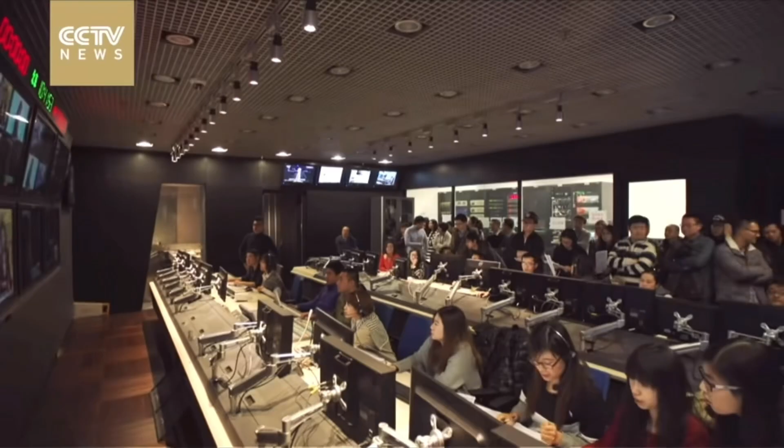This building is the headquarters of CCTV, China's main state-owned television broadcasting network, and is located in Beijing and includes administrative offices, newsrooms, broadcasting rooms, program production rooms, and studios.

At the time, Beijing was undergoing a massive urban redevelopment project ahead of the 2008 Olympic Games, which required a new landmark building. In addition, the existing CCTV headquarters was struggling to keep up with the latest broadcasting technology and efficient operations due to its aging facilities and remote space, and required a new headquarters that would incorporate the latest broadcasting technology, provide a variety of broadcast studios, and ample office space.

The project was therefore undertaken by Rem Koolhaas and his architectural firm OMA. Dutch architect Rem Koolhaas is one of the most influential architects in contemporary architecture, known for his innovative and experimental designs. His major works include the Seattle Central Library, Casa da Musica, and De Rotterdam.

His work often reflects a specific social and cultural context, and he believes that architecture should function as a social phenomenon, not just a building. These characteristics of the architect are also reflected in the CCTV headquarters.

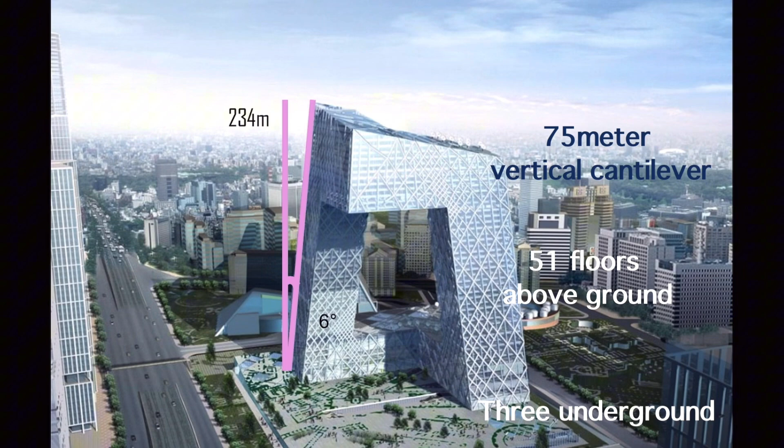The CCTV headquarters is about 234 meters tall, with 51 floors above ground and 3 underground, consisting of 2 towers tilted at 6 degrees, joined by a 75-meter vertical cantilever. The shape is similar to a prehistoric dolmen.

The construction of dolmens required a great deal of labor, and the larger the dolmen, the greater the authority and power of the group. With the CCTV headquarters building, Rem Koolhaas wanted to show the world that China had emerged as a world power through the Beijing Olympics.

And instead of competing for ultimate height and style within a traditional two-dimensional tower that soars toward the sky, CCTV's loop provides a truly three-dimensional experience, culminating in a 75-meter cantilever.

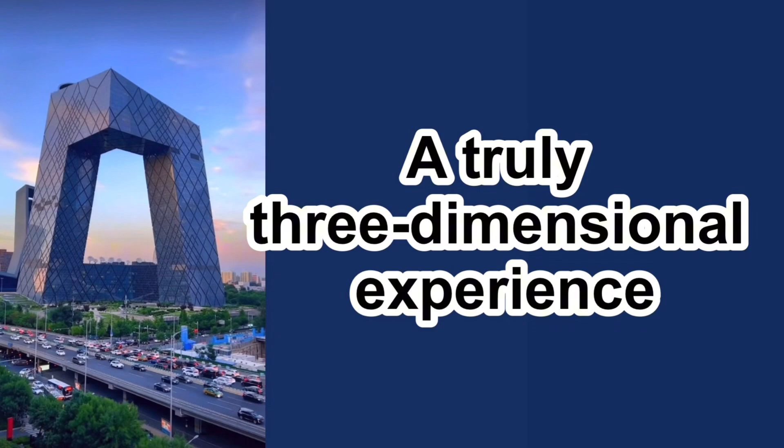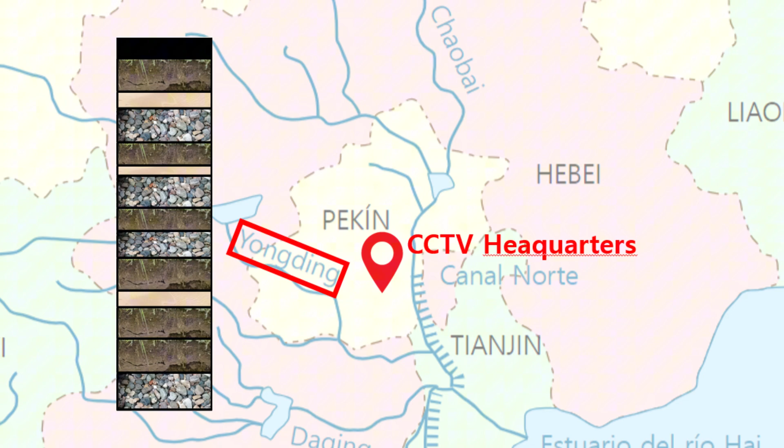However, due to this unique design, structural instability caused by the concentration of loads at one end has to be addressed. In addition, CCTV is located in the central business district of Chaoyang District, Beijing, China, which is in the middle and lower reaches of the Yongding River, which has weak soils and uneven ground.

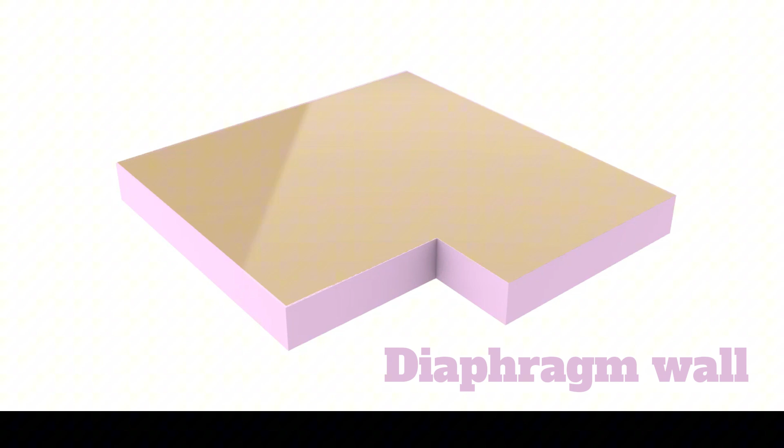Consequently, a piled raft foundation was chosen, followed by the bottom-up construction method, starting from the underground structures and progressing upwards. The process began with a soil investigation to evaluate the ground conditions and determine the optimal locations and depth for the piles. Once this assessment was complete, excavation commenced to reach the necessary depth for a stable foundation.

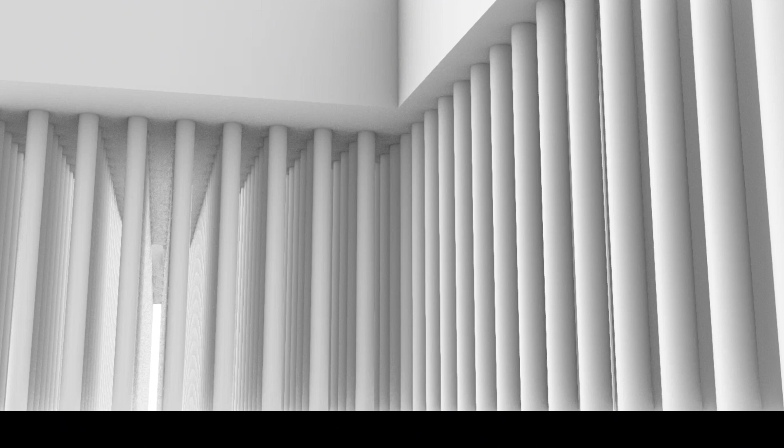During excavation, diaphragm walls were installed to prevent soil collapse and ensure stability. Upon completion of the excavation, piles with a diameter of 1.2 meters and a length of 52 meters were driven into the ground. These piles served to transfer the building's load to deeper, more stable soil layers.

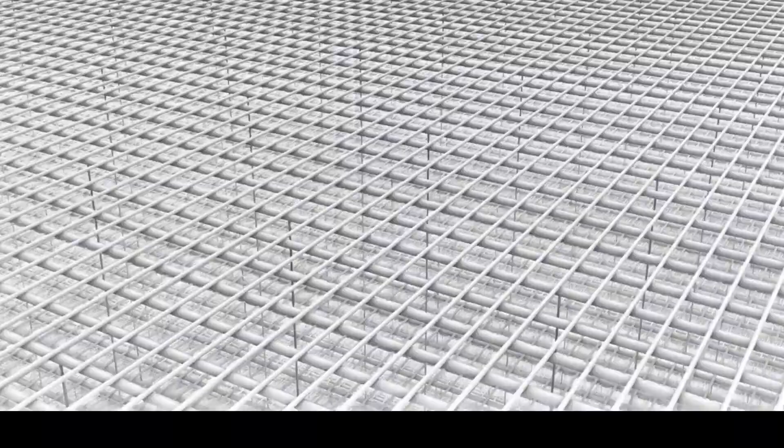Following the pile installation, the raft foundation was constructed atop the piles. The raft foundation works in conjunction with the piles to evenly distribute the entire building load, mitigating the risk of punching shear failure, which could occur if only piles were used due to their small cross-sectional area. After installing the piles, rebar was placed in the raft foundation and concrete was poured.

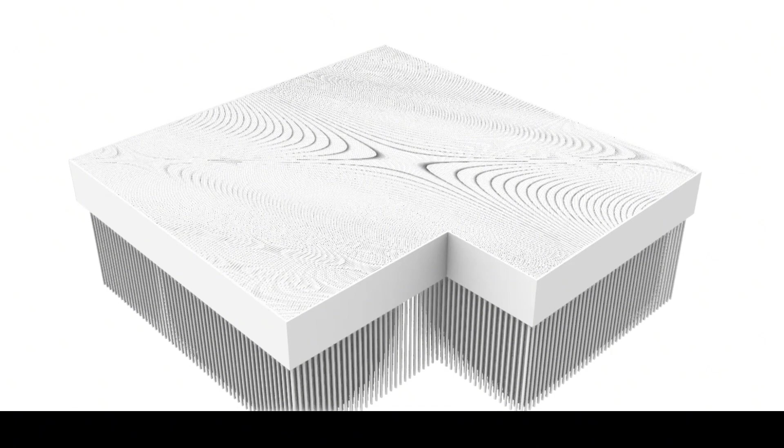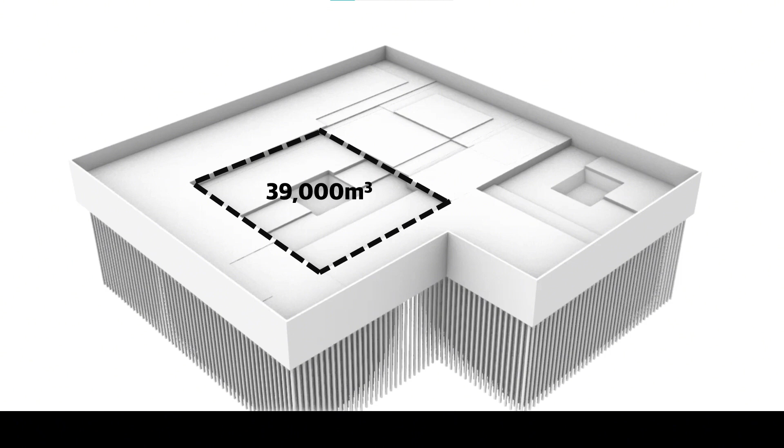HRB 500 grade rebar was used for the raft, with the lower section reinforced with 2 to 7 layers of mesh and the upper section with 2 to 3 layers of mesh. The concrete pouring for Tower 1 took 52 hours with a total volume of 39,000 cubic meters. For Tower 2, the concrete pouring took 54 hours with a total volume of 33,000 cubic meters. The total volume of concrete poured for the base plate exceeds 120,000 cubic meters.

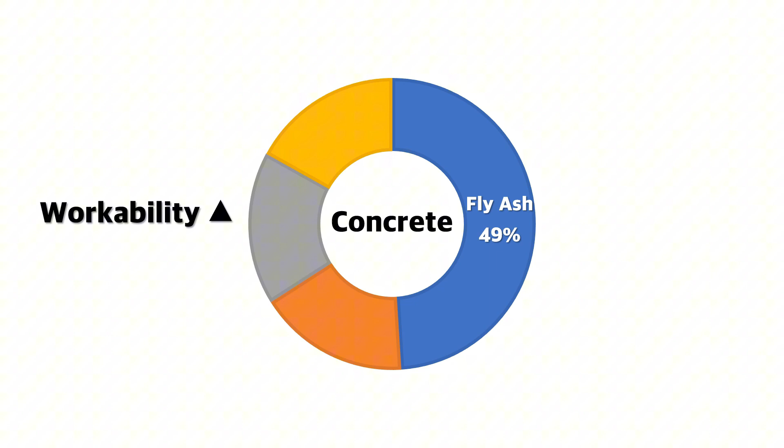During the massive concrete pouring process, crack control is the critical aspect. To address this, CCTV implemented two key methods. The first method involved increasing the proportion of fly ash in the concrete mix to 49%. Fly ash enhances the workability of concrete, reduces shrinkage, prevents shrinkage cracks, and lowers the heat of hydration, thus preventing temperature-induced cracking.

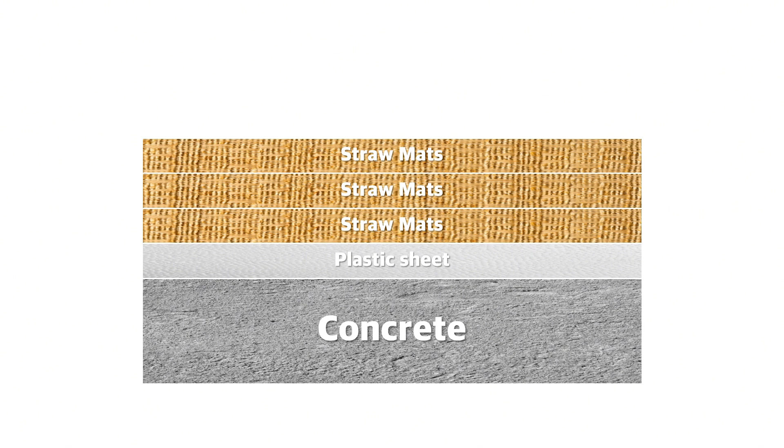The second method included using a combination of plastic sheets, 3 layers of straw mats, and 1 layer of canvas for insulation and curing. Additionally, a large-capacity computerized concrete temperature monitoring system was employed to measure the temperature in real time. Maintaining appropriate temperature and humidity levels while the concrete gains initial strength is crucial for preventing cracks, and this method effectively ensures this.

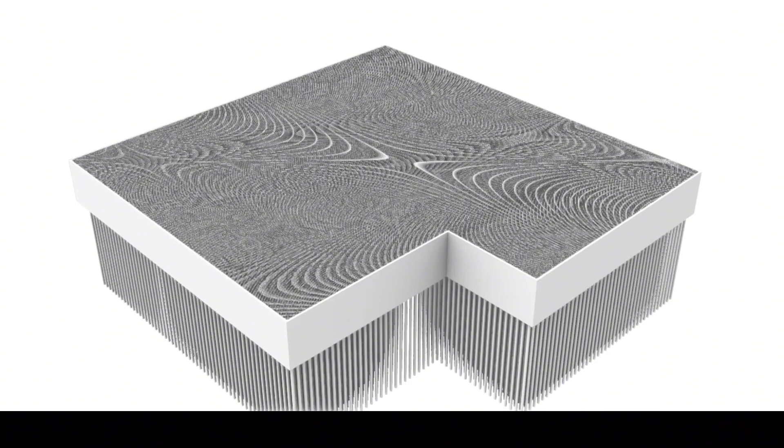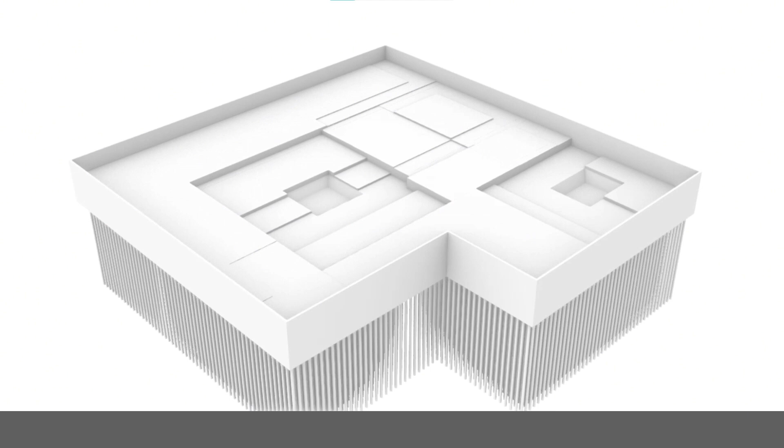HRB 500 grade rebar was used for the raft, with the lower section reinforced with 2 to 7 layers of mesh and the upper section with 2 to 3 layers of mesh. The concrete pouring for Tower 1 took 52 hours with a total volume of 39,000 cubic meters. For Tower 2, the concrete pouring took 54 hours with a total volume of 33,000 cubic meters. The total volume of concrete poured for the base plate exceeds 120,000 cubic meters.

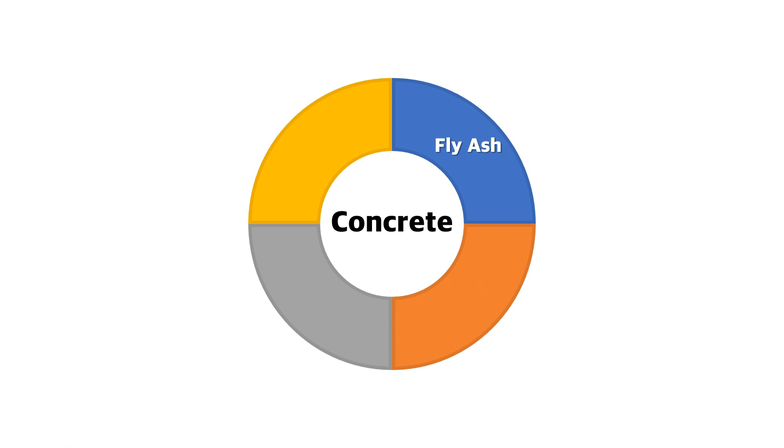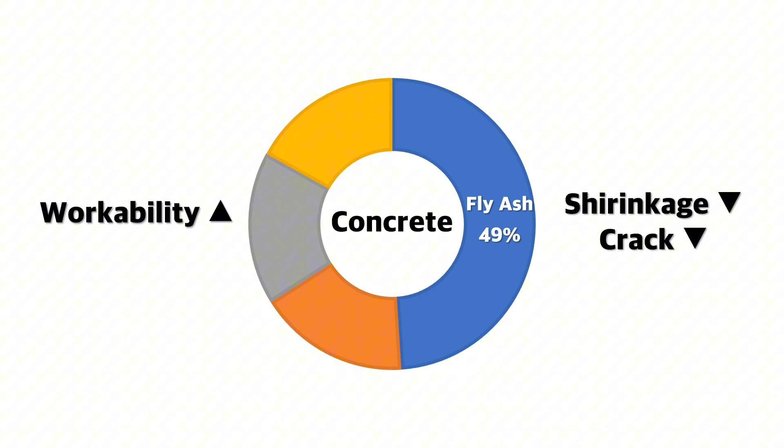During the massive concrete pouring process, crack control is the critical aspect. To address this, CCTV implemented two key methods. The first method involved increasing the proportion of fly ash in the concrete mix to 49%. Fly ash enhances the workability of concrete, reduces shrinkage, prevents shrinkage cracks, and lowers the heat of hydration, thus preventing temperature-induced cracking. The second method included using a combination of plastic sheets, 3 layers of straw mats, and 1 layer of canvas for insulation and maintenance.

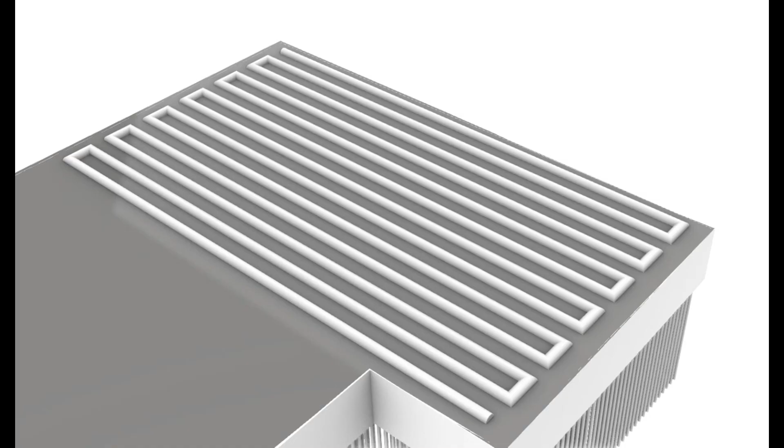Additionally, a large capacity concrete computer temperature monitoring system was employed to measure the temperature in real time. Maintaining appropriate temperature and humidity levels while the concrete gains initial strength is crucial for preventing cracks, and this method effectively ensures this. We also used pipe cooling to control internal heat generation during this process. This measure prevented the concrete from cracking and created a solid foundation.

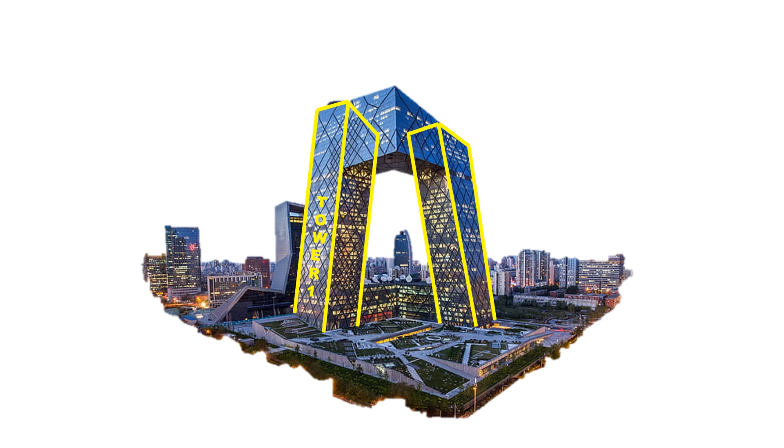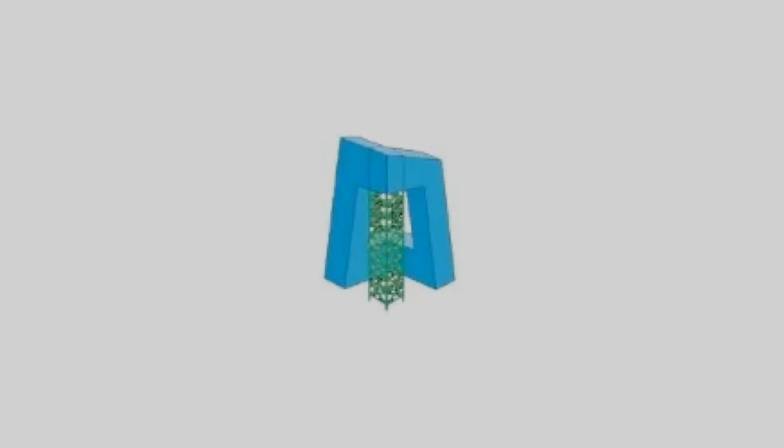The cantilevered portion of the CCTV required a different construction process than that of a conventional two-dimensional skyscraper. Therefore, ARUP considered a total of three methods to construct the cantilever. The first method considered was the temporary tower support method. This method uses temporary towers to support the structure while the cantilever of the building is constructed. This temporary tower provides the necessary support until the cantilever has achieved structural stability on its own. After that, the temporary tower is removed.

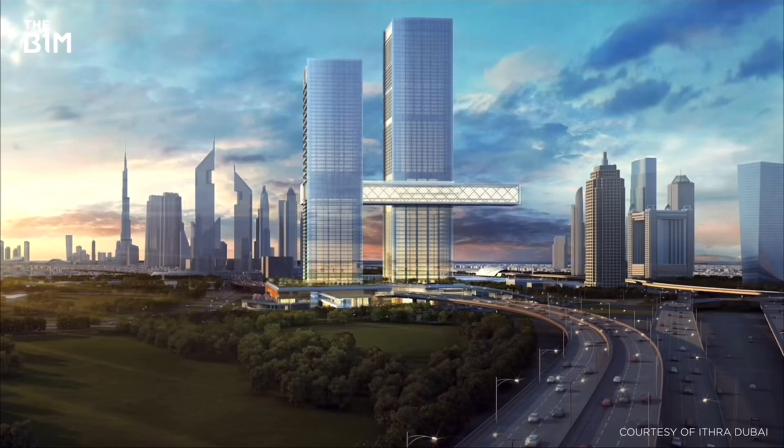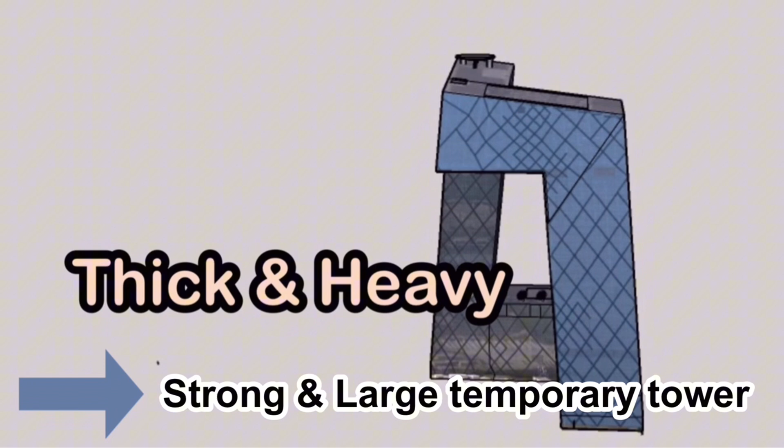For example, thin and long structures cannot resist bending moments on their own, so this method is used not only in bridges, but also in buildings with long and thin structures such as bridges. However, in the case of the CCTV cantilever, it is very thick and heavy, so there is a problem that it requires a strong and large temporary tower that can withstand a large load. Designing a temporary tower that could withstand a large load was not easy in itself, and even if designed, a lot of labor and cost were required to install, maintain, and remove the temporary tower, so a method other than this method was needed.

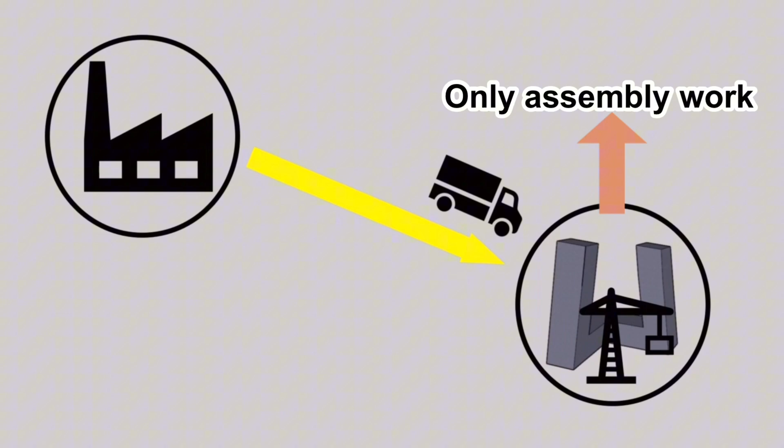The second method considered is the lift-up prefabrication method. In this method, the cantilever portion of the building is manufactured in a factory as large-scale modules, which are then transported to site and installed using a crane. Only assembly work is mainly performed on site. This method has the advantage of significantly reducing on-site work time and ensuring quality because the modules are manufactured in a highly controlled manufacturing environment, protected from external conditions such as weather.

The Umeda Sky Building's floating garden is a representative example of construction using a method of manufacturing modules and then lifting them. This building is located in Osaka, Japan, and is especially famous for the floating garden located at the top, a characteristic structure that connects two towers. The Umeda Sky Building floating garden consists of an observation deck and a relaxation area for visitors. It was suitable to use prefabricated modules because the internal structure was relatively simple and did not require additional heavy or complex equipment.

However, in the case of the CCTV headquarters building, the cantilever part is structurally complex because it accommodates the broadcasting studios and offices. This results in increased costs and technical difficulties in module production. Additionally, the complex structure also increases the weight of the module. This causes additional problems: the transportation cost of moving modules from the factory to the field increases, and the process of lifting and assembling heavier modules becomes much more difficult.

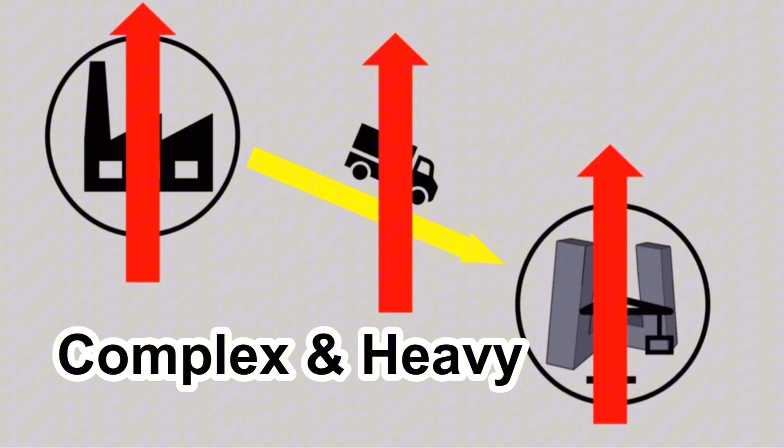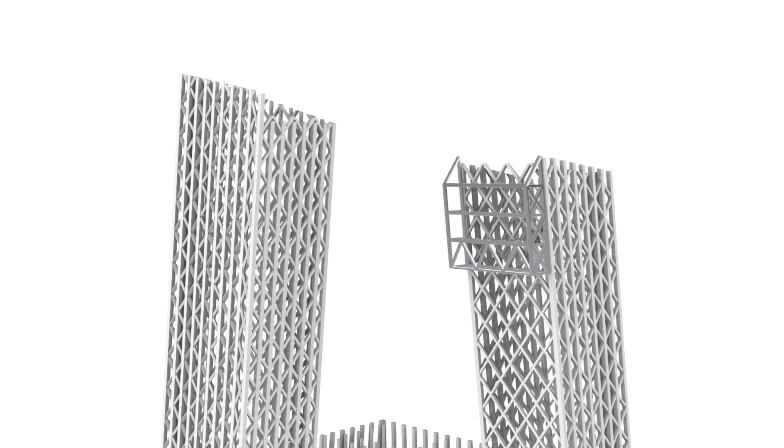So which method did ARUP adopt to solve the problems of the first and second methods? The method ultimately adopted for cantilever construction of the CCTV headquarters building is the balanced cantilever method. First, let's check the process of this method through a 3D model that we created ourselves. As you can see, during cantilever construction, a horizontal member is supported through a diagonal member and construction of two independent cantilevers is carried out. In this process, the lowest part of the cantilever meets first, and then construction of the remaining part proceeds.

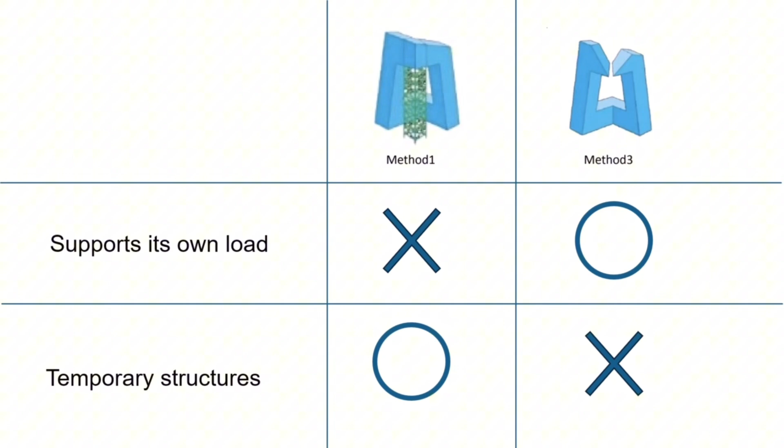This method is easy to adjust on site and can more accurately meet the design requirements of complex structures through a gradual construction process. Additionally, because it supports its own load, far fewer temporary structures are used compared to Method 1, and because both cantilevers are constructed on site at the same time, it takes less time and costs less in terms of transportation and crane operations than lifting complex and heavy modules using Method 2.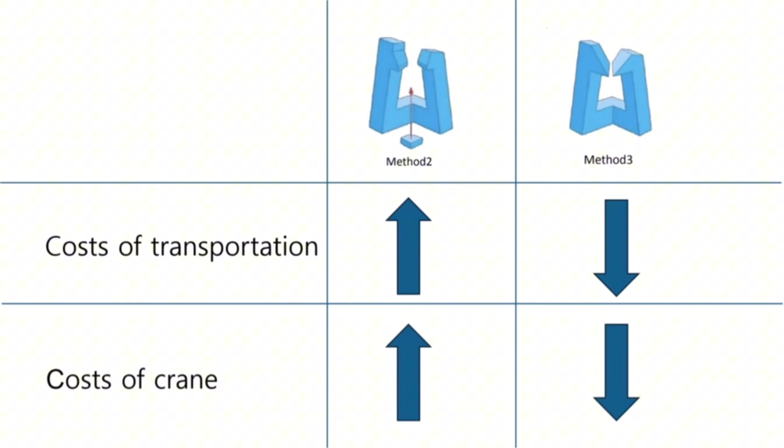In other words, we were able to solve the problems of the first and second methods by conducting construction using the balanced cantilever method through accurate calculations. However, challenges remain to be addressed with this approach. If constructed this way, the two cantilevers must engage exactly in the center.

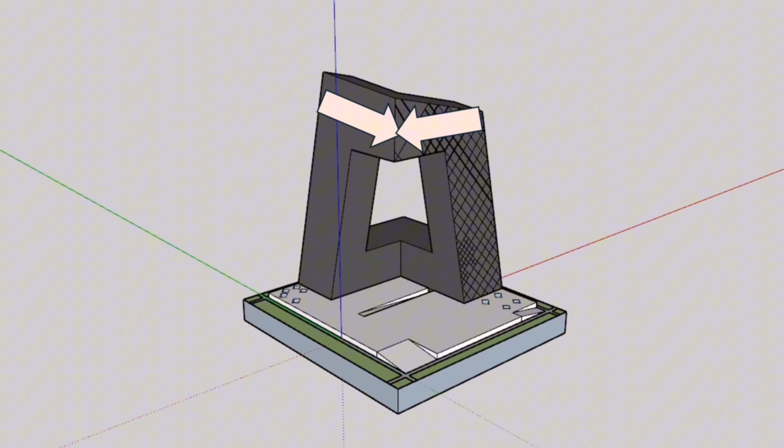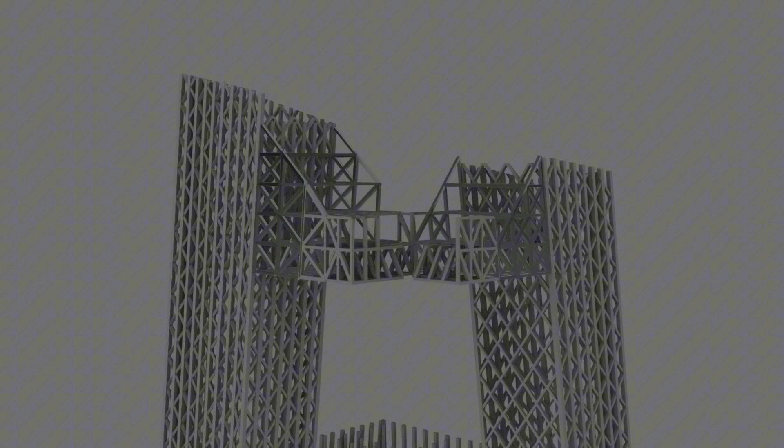However, the metal members used during construction have distinct thermal expansion and contraction effects which generate stress. This is the main factor stopping the two cantilevers from meeting exactly in the center. Let's take a look at how this problem was solved. First, in order to effectively manage these thermal expansions, contractions, and stresses, and to achieve optimal structural alignment, expansion joints were used to connect the tower and cantilever.

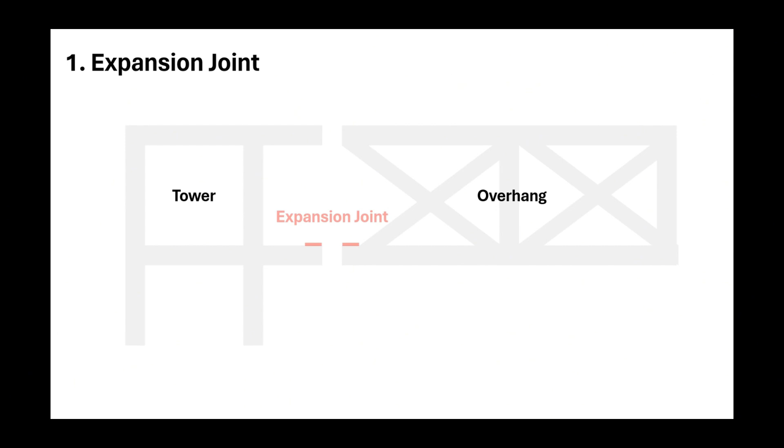Expansion joints provide the necessary flexibility at the connection points of structures during construction, allowing them to withstand expansion and contraction due to temperature changes. This plays an important role in minimizing the negative impact of heat-induced deformation on structure stability.

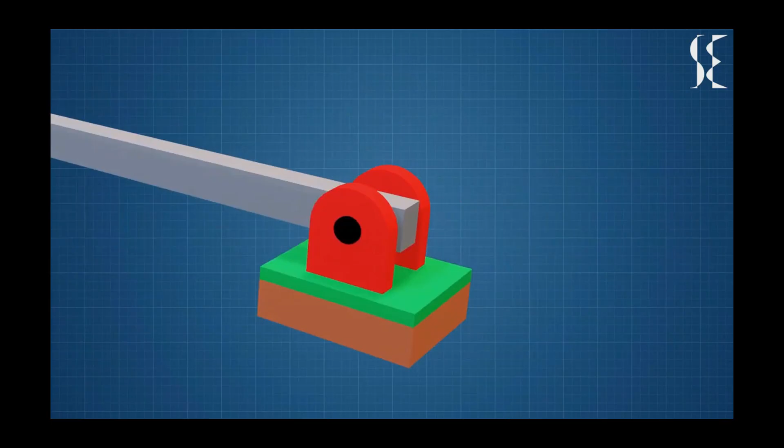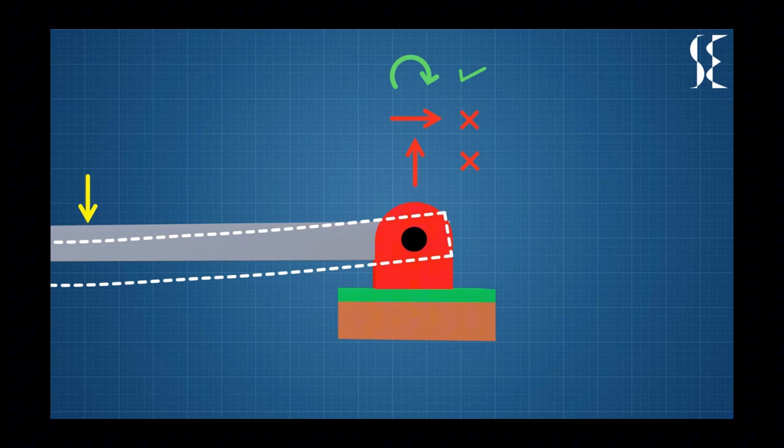Additionally, when the cantilever structures extending from both sides meet in the center, they are connected through 7 links. This connection was made by a pin joint. Pin joints allow rotation of members but limit horizontal or vertical movement. By connecting the 7 links with pin joints, each tower is designed to respond independently to loads by supporting it horizontally and vertically but also allowing rotation.

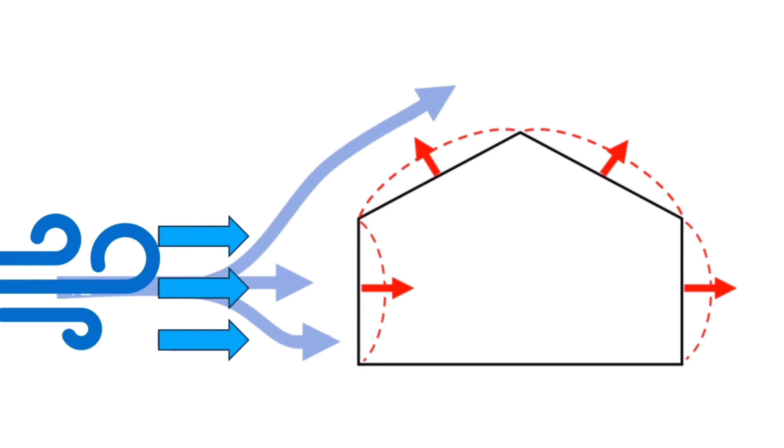When constructing high-rise buildings or complex structures, wind can be a big variable. Wind places additional dynamic loads on structures and can affect the safety of construction equipment such as cranes. Therefore, construction of the CCTV headquarters building was carried out in the morning on a windless day to minimize movement of the structure and ensure maximum construction precision. Morning hours are generally chosen because there is less wind and the atmosphere tends to be more stable.

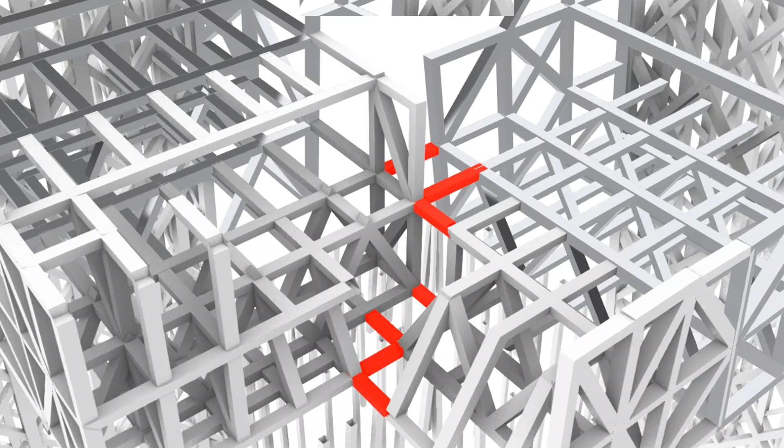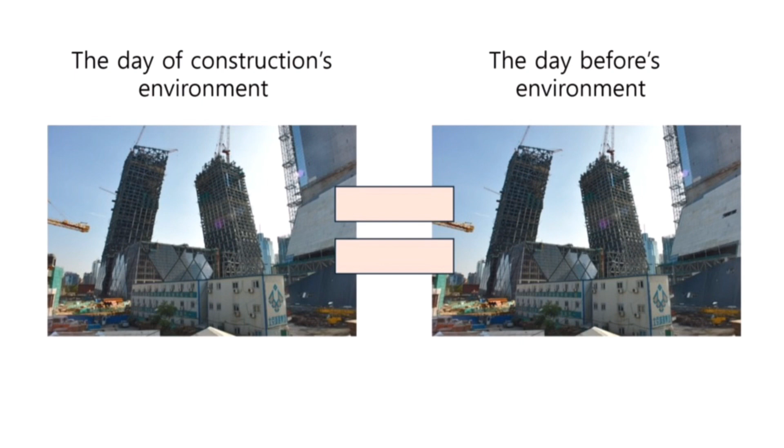Additionally, since the building's connecting elements and structural joints are directly related to the building's stability, their precise adjustment is essential. At the CCTV headquarters building, the length of all connecting elements was finally measured 24 hours before the connection. By measuring at the same time the day before, the environment on the day of construction was predicted as closely as possible to maintain the connection elements in optimal condition and minimize the impact of environmental changes or other factors on the structure on the day of construction.

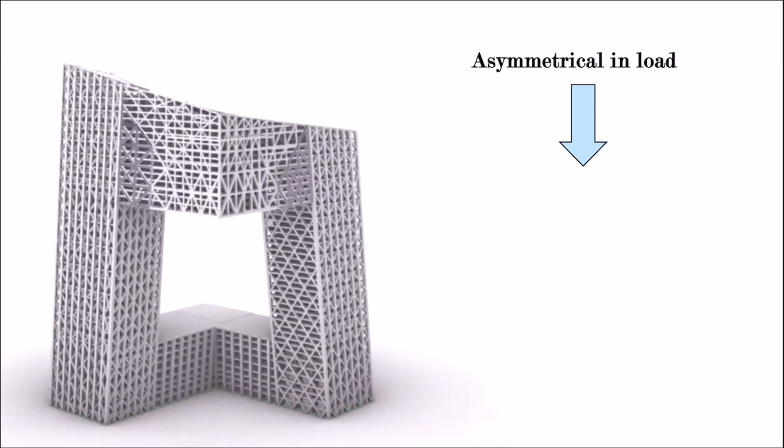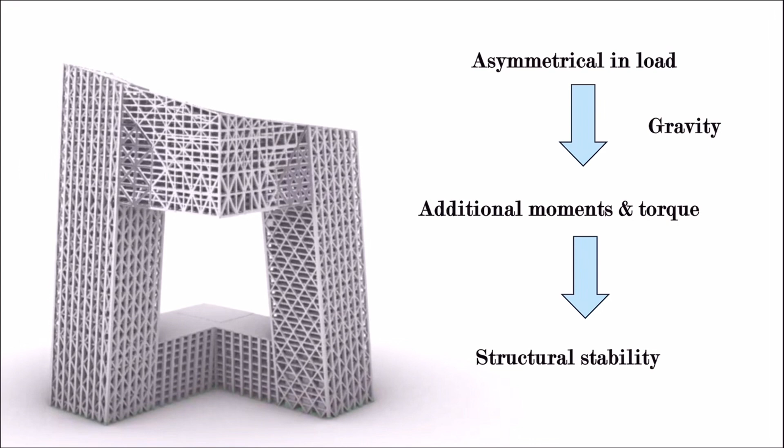Tilted buildings, especially those shaped like the CCTV headquarters building, are inherently designed off the vertical axis, resulting in an asymmetrical distribution of loads acting on the building. As a result, these asymmetrical loads generate additional moments and torques due to the effects of gravity. This directly affects the structural stability of the building, making the role of the supporting core even more critical than in a typical building. The tower part of CCTV headquarters has a 6-degree tilted shape.

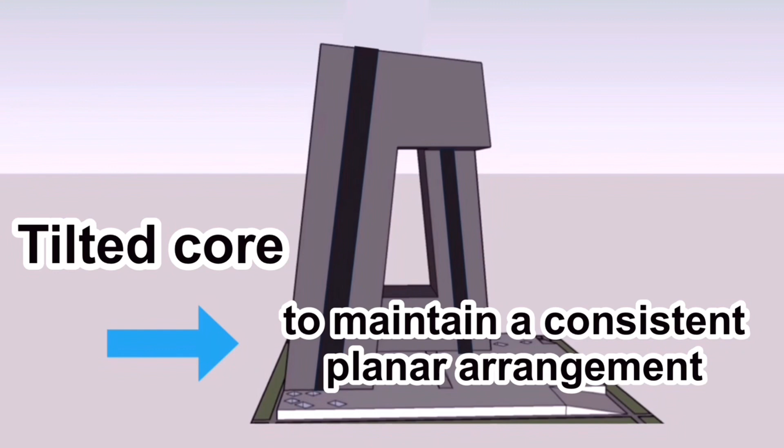OMA considered a tilted core structure to reflect this tilted shape in the initial design stage to maintain a consistent planar arrangement. However, the tilted core structure has some problems. First, tilted cores resulted in asymmetric load distribution, making it difficult to secure structural stability. This led to the generation of additional moments, resulting in the need for more special materials such as steel and high-strength concrete than typical vertical cores. These special materials contributed to a significant increase in the overall construction cost.

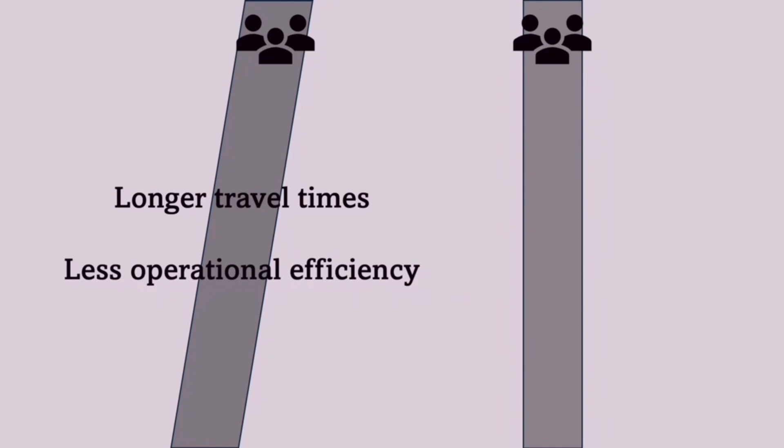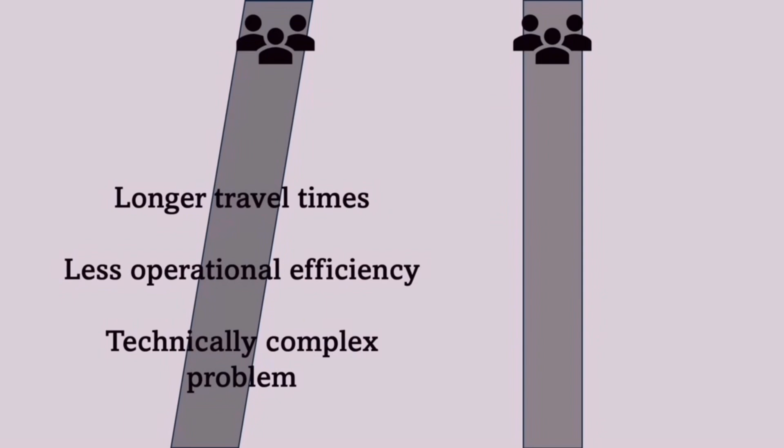Second, when the elevator's travel path was oblique, the passengers' travel time was prolonged and the elevator's operational efficiency decreased. In addition, the technical complexity of the elevator system also increased, adding difficulties to operation and maintenance. Eventually, these rising costs and technical limitations led to abandoning approaches using tilted core structures.

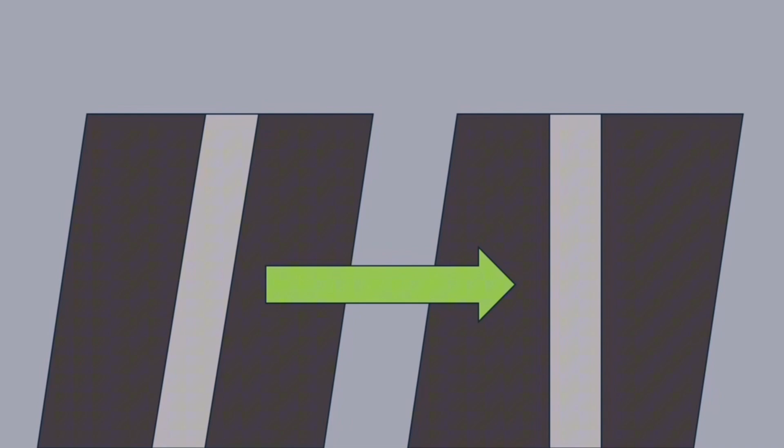What form of core did ARUP and OMA use to solve the tilted form of the building instead of the tilted core? To create a unique shape, the CCTV headquarters keeps the outer tube structure in an inclined shape, while the core is designed vertically. However, if one vertical core is used here, like other buildings, the tilted structure limits the space where the core can be located. The importance of the core grows further in tilted buildings, which can lead to structural instability.

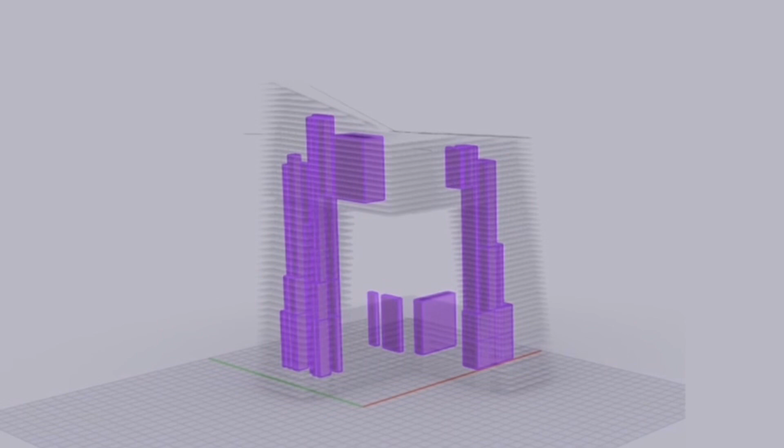To address this issue, instead of placing one vertical core, they chose to place multiple vertical cores at various heights according to the degree to which the building is tilted. As a result, 7 vertical multi-cores with different heights were placed in the CCTV building. In particular, the tower core, bottom core, and cantilever core were properly placed, respectively, as the core is the main factor supporting the load applied to the overhang structure.

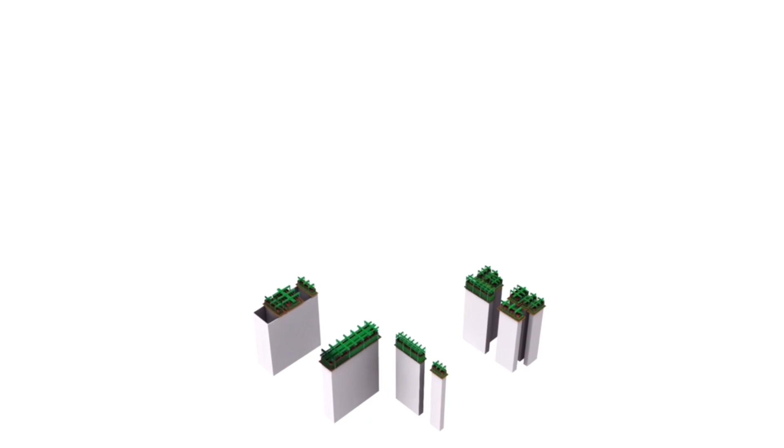In this process, an auto-climbing system was used for construction workability when placing concrete on the outer wall of the core. Since the cross-section of the core is not constant, a new formwork was needed to adjust to the changes in each cross-section. Therefore, in the part where the cross-section of the core changes, a flexible climbing formwork system was applied that disassembles the formwork and reassembles it according to the cross-section. Each of these cores was designed to efficiently integrate elevators, stairs, air conditioning systems, and power and data wiring.

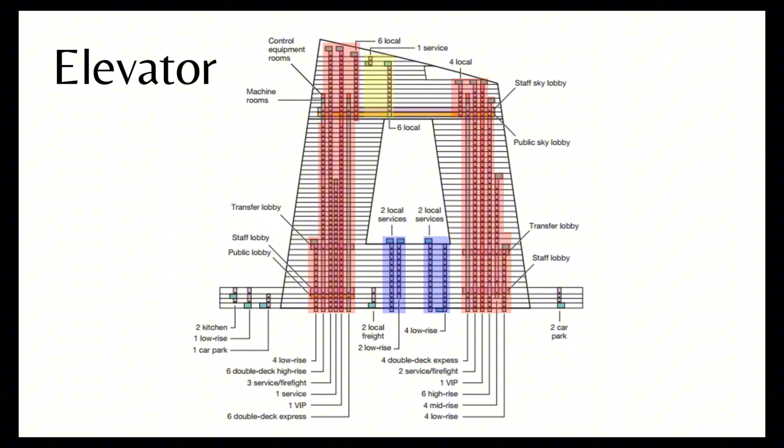The elevators in the CCTV building had to be located inside different cores while accommodating large amounts of people, so the number of floors and users available were divided. The CCTV building has a multi-core structure that consists largely of Tower Core 1, Tower Core 2, Bottom Core 1, Bottom Core 2, and Cantilever Core, which has a total of 90 elevators arranged in this multi-core.

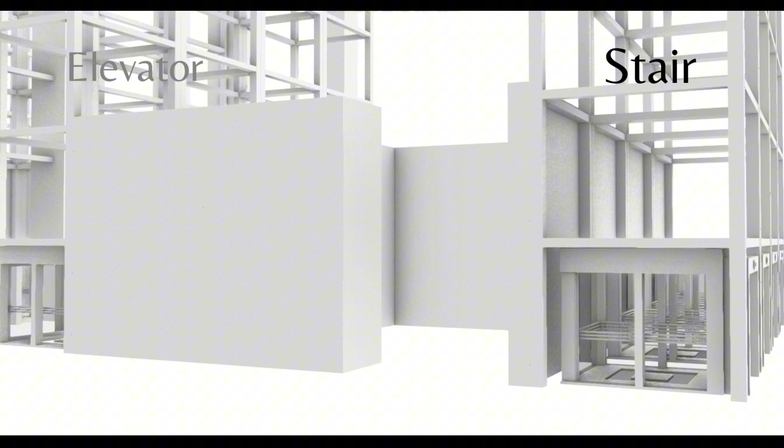In order to efficiently accommodate a large number of people, a number of double-deck elevators have also been arranged that allow you to board two floors at a time. All staircases are integrated within the central core, providing safe evacuation routes in case of fire or emergency. The escape routes are designed for quick access to staircases from each floor and are used in certain areas in parallel with elevators.

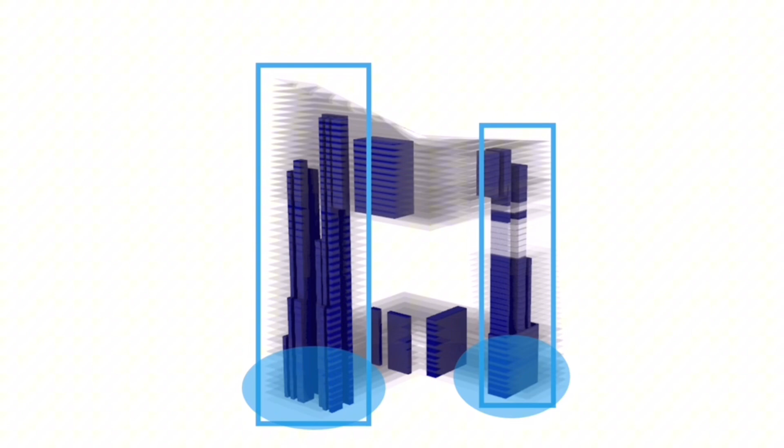The tower side core is fixed to the ground. Lateral loads are fatal. Especially in the CCTV building, there was a core without footings in the cantilever part, which required further consideration. So, what method could have been used to solve this problem? The answer was to install the transfer truss, which acts as an outrigger. The outrigger system connects the core to a mega column or wall, reducing the moment of the core and holding the displacement. In the CCTV building, they connect the cantilevered core to the exoskeleton in the form of a truss.

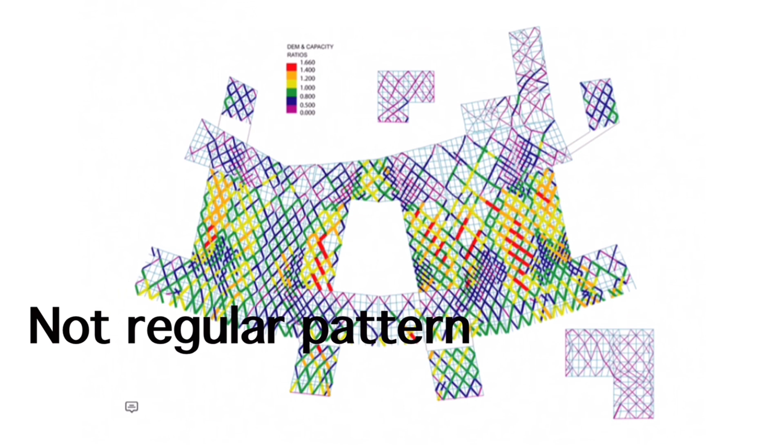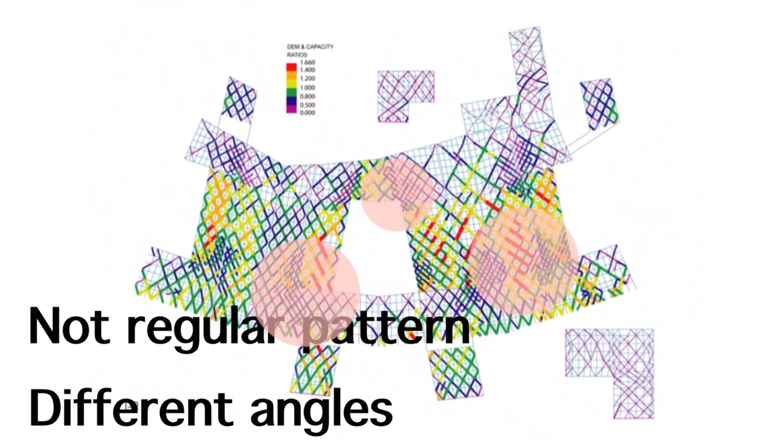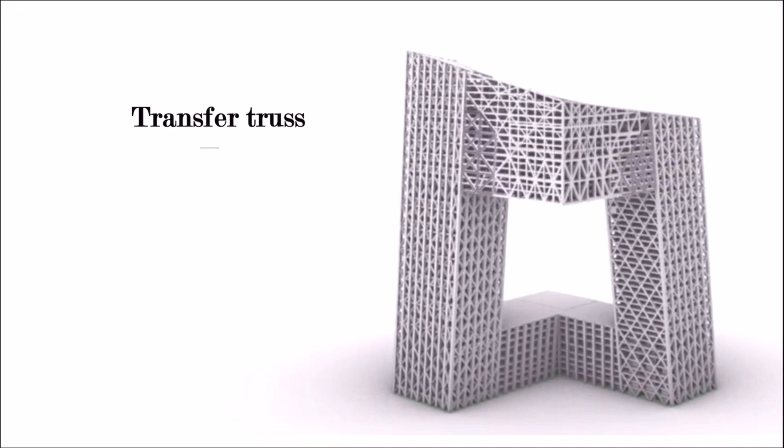The exoskeleton of CCTV is a diagrid structure. Unlike a regular diagrid, the diagrid is not laid out in a regular pattern, but at different angles to suit the optimal angle of each section, and more tightly spaced in areas of high stress. The continuous diagrid structure, connected by a butterfly node, also acts as a continuous loop throughout the CCTV building, allowing stresses in a particular section to be distributed throughout the building. The diagrid structure also allows loads transferred to the transfer trusses to be distributed throughout the building. This design allowed the CCTV building to retain its unique leaning form while providing an efficient and safe internal structure.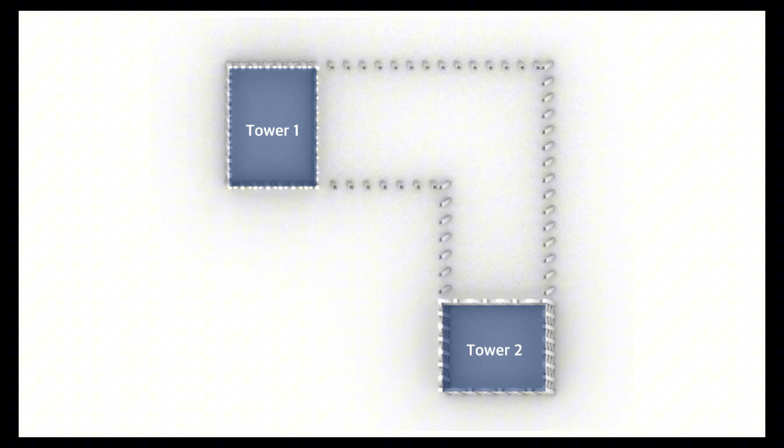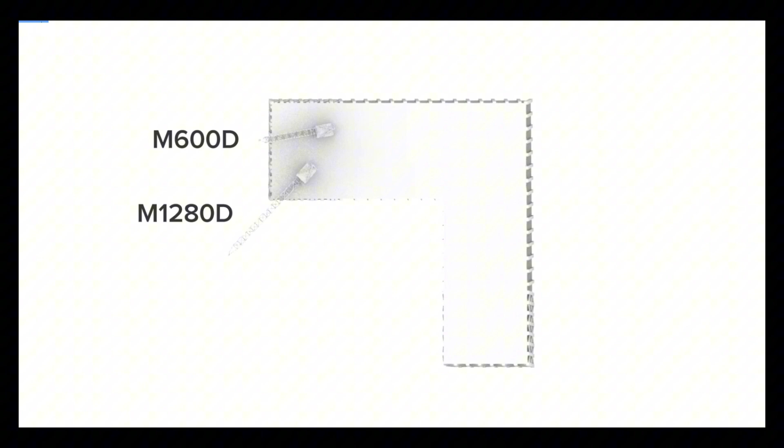So how were the members lifted up in the process? The members used for CCTV were lifted through tower cranes. The work area was divided into three areas: Tower 1, Tower 2, and Podium. Tower 1 and Tower 2 were each placed with one M1280D tower crane and one M600D tower crane, and the Podium has two M440D tower cranes and one C7050 tower crane, which used a total of 7 tower cranes.

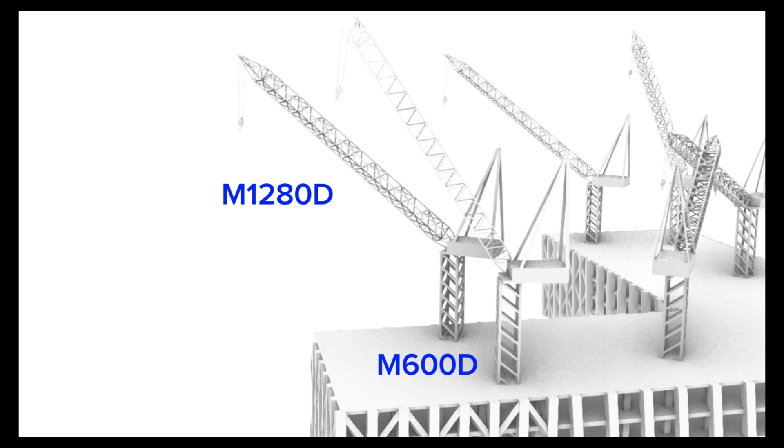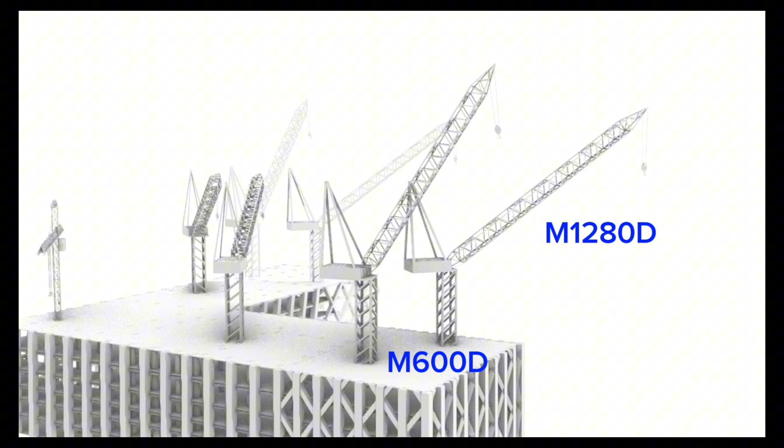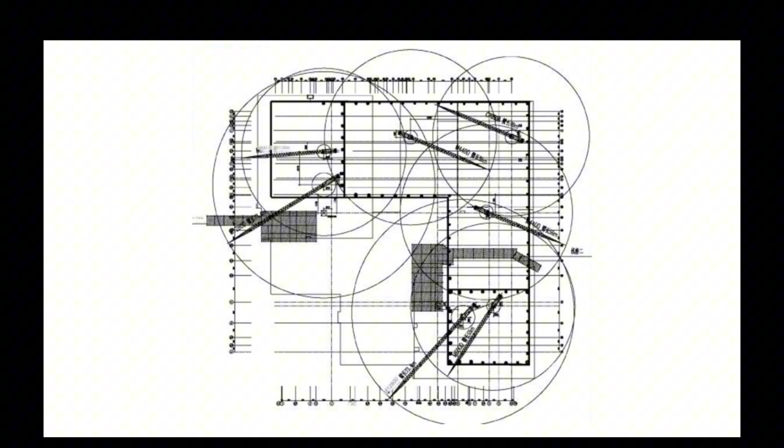The high-rise part of Tower 1 and Tower 2 were equipped with a large tower crane M1280D with a lifting capacity of hundreds of tons, and a medium and large tower crane M600D with a capacity ranging from several tens to hundreds of tons. These cranes had the ability to safely lift heavy components even at high altitudes. Since there was a lot of work in the Podium section that required high accuracy at relatively low heights, two medium-sized tower cranes M440D with lifting capacity of several tens of tons were deployed. Due to the limited space in the Podium section, the C7050 crane with a wide working radius was placed at the center, and two medium-sized cranes M440D were placed on both sides of the Podium to efficiently utilize the space.

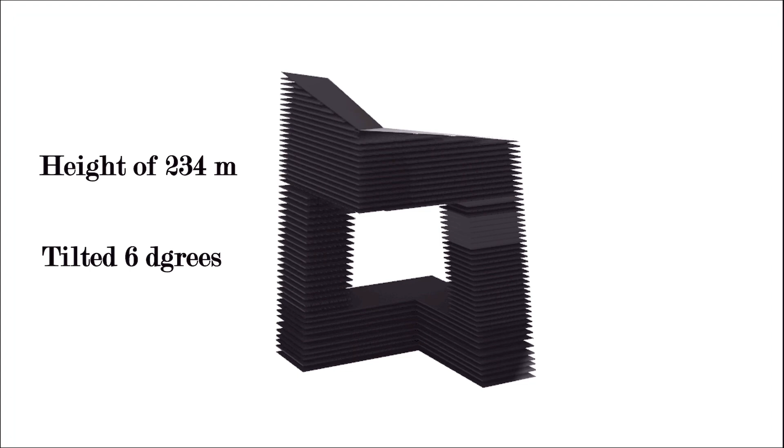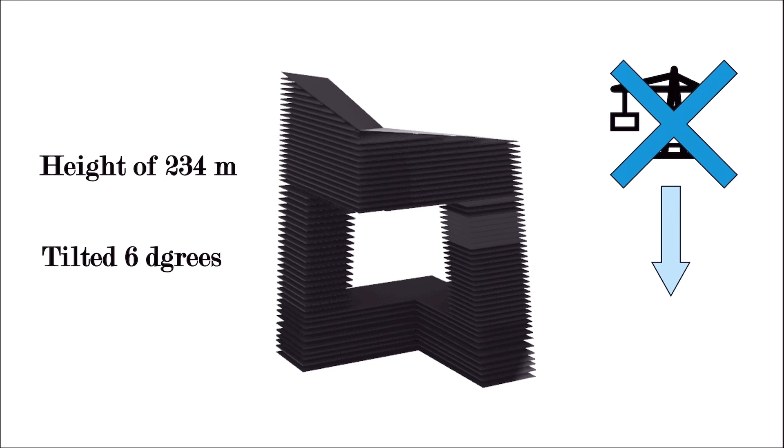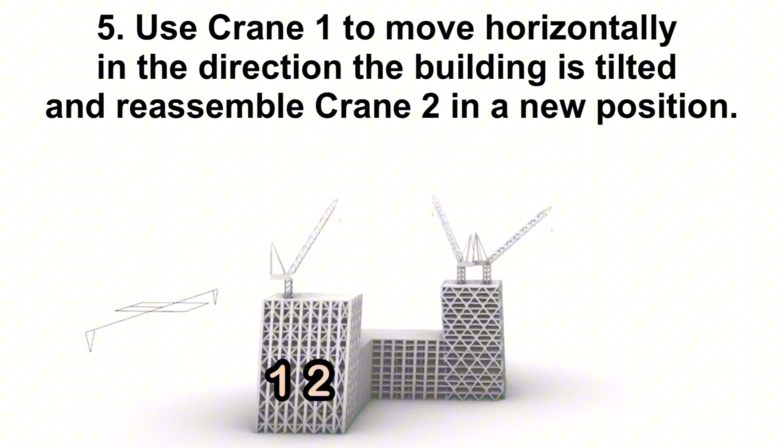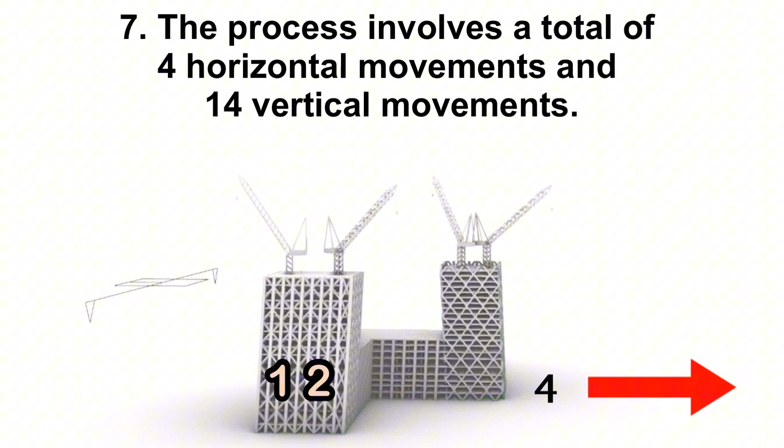However, since the CCTV headquarters building is 234 meters high and the tower part is inclined at 6 degrees, it was not possible to use the method of building with a tower crane moving vertically. Therefore, the CCTV headquarters building adopted the method of building with two tower cranes. 1. Install tower cranes 1 and 2 on the ground. 2. As the height of the building increases, the cranes move vertically. 3. As the building rises, due to the 6 degree tilted tower, crane 2 cannot reach the end of the building due to the limit of horizontal distance. 4. Therefore, crane 1 is used to dismantle crane 2. 5. Use crane 1 to move horizontally in the direction the building is tilted and reassemble crane 2 in a new position. 6. Crane 1 and crane 2 resume working again. 7. The process involves a total of 4 horizontal movements and 14 vertical movements. In this way, the construction of the tower part of the CCTV was completed.

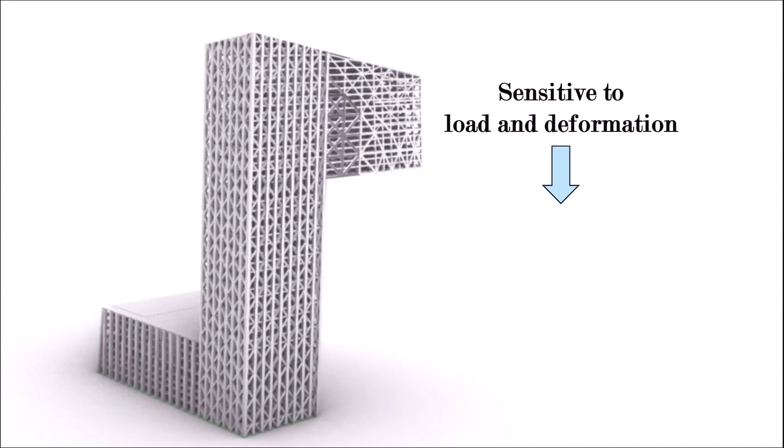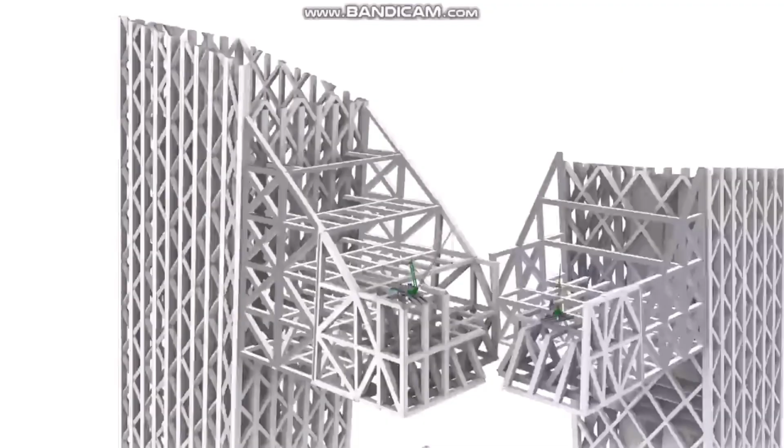However, since the cantilever structure extends significantly from the center of the building, it was not possible for the tower crane to procure it directly. The construction of the cantilever structure was more sensitive to loads and deformations than other parts of the building, requiring high precision and stability, which is why hanging cranes were used. The type of hanging crane used in the construction of the CCTV headquarters was a derrick crane, which is installed on the side of the building and is very flexible. It can be moved and reassembled as required, with all the necessary members for the cantilevered part procured and installed in the exact location. With all the above, we will conclude the final video of the construction project plan for Team 9.